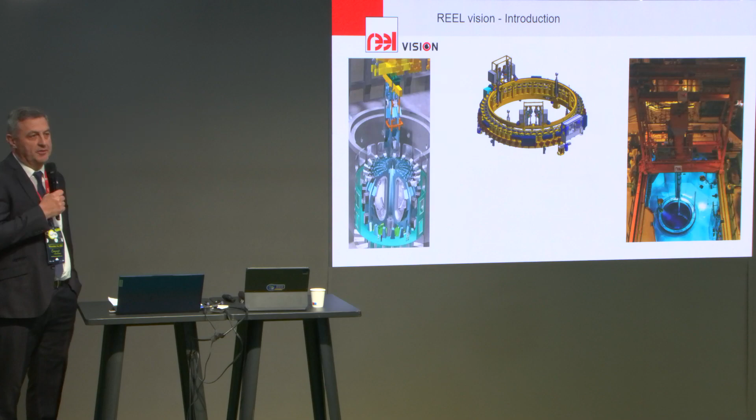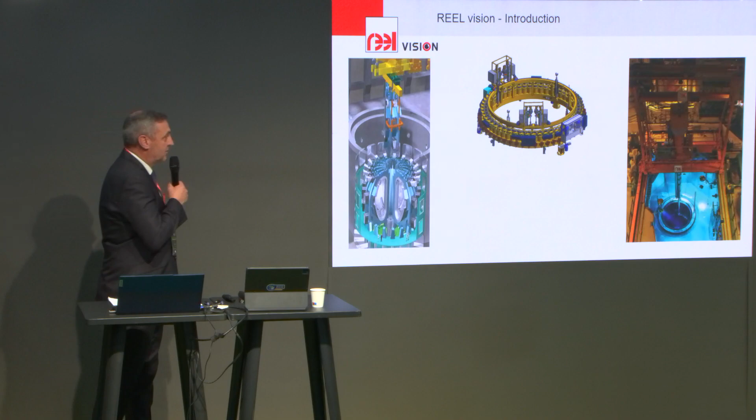REEL designs and manufactures several complex machines involved in a sensitive process, where a machine failure could affect directly the safety and performance of the process. It is the case in nuclear domain applications. You see on the right the refueling machine used to load and unload the core. In the middle, it is a multi-stud tensioning machine used to open and close the nuclear core cover. And on the left, the ITER crane.

The design of this machine must be safe and reliable, in order to limit as much as possible the process downtime and operating cost associated. That means we have to secure the maintenance of this machine to be able to say that they are secure and safe to achieve their roles and performance.

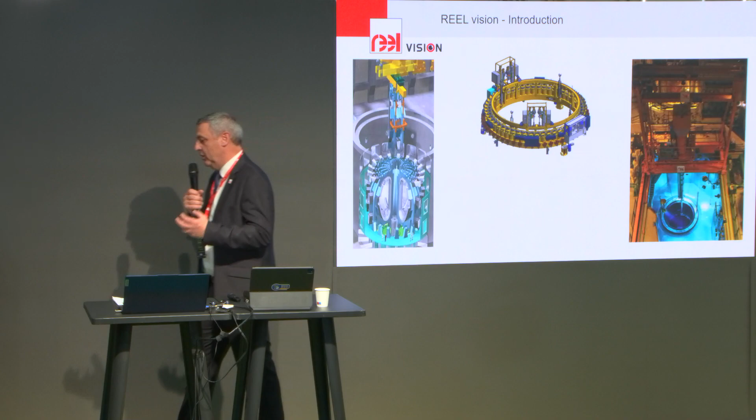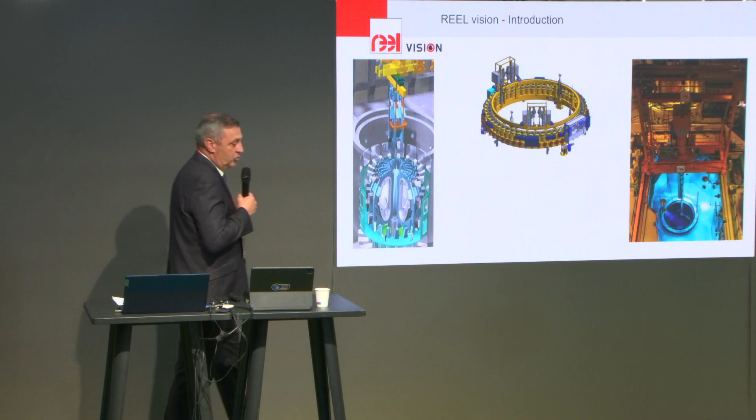We have also to anticipate the maintenance. To secure the maintenance, first we must be able to deliver a secure and reliable diagnostic. And to anticipate the maintenance, we need to be able to predict the failure before the event occurs. We can say that today the current conventional solutions, corrective and preventive maintenance, don't allow us to achieve these requirements.

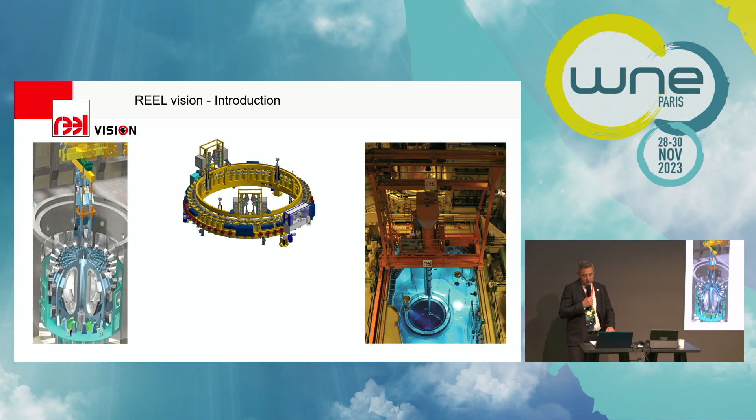So in this context, REEL has been engaged for several years in an R&D topic to develop its own online service platform dedicated to its customers, to provide them factual and reliable data regarding their machine condition in order to anticipate the maintenance. That means to be able to deliver data to the people to make a quick maintenance and to have a good troubleshooting.

To optimize the production, this data will allow us to generate performance KPIs, which is the key input for the global continuous improvement process. To improve the quality, this data is able to generate some KPIs that allow us to detect any deviation of the machine compared to a nominal reference, and like this improve the safety and quality level of the machine.

And then to develop skills, that means this data allows us to have feedback on how the operator drives the machine, in order to give opportunity to REEL to improve the design, in particular regarding HMI, maintenance tools, etc. So this is the main purpose of the REEL Vision IoT platform.

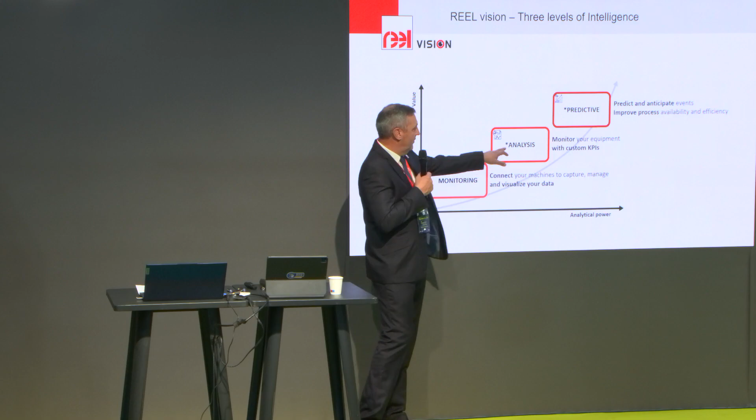Then you have the analysis level. We analyze the data we collect from the machine in order to define some specific KPIs to monitor the machine behavior.

And the last level, called predictive, the idea is to give some KPIs we consider to predict even before the failure occurs, in order to be able to repair it and not impact the process downtime and operating cost associated, while improving the safety and quality level of the machine.

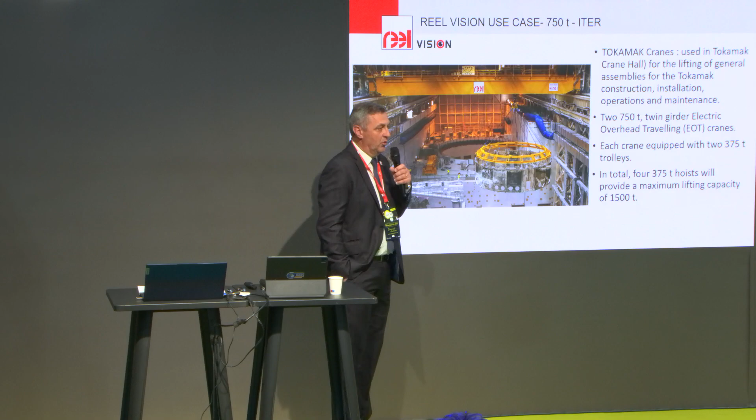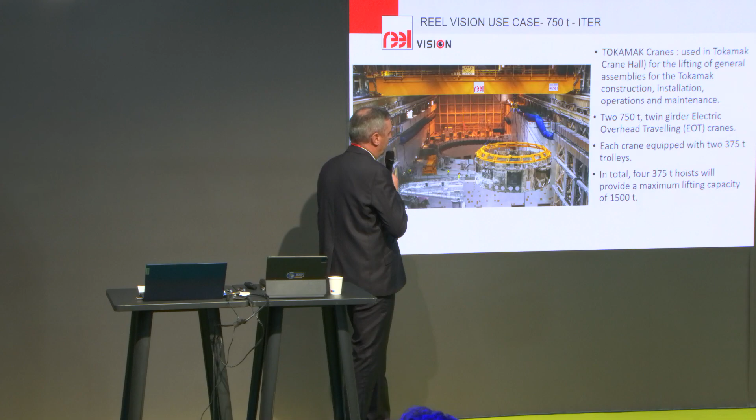The ITER crane is a very huge crane, 750 tons. We have 2 cranes with a maximum lifting capacity of 1,500 tons. They are installed in a tokamak hall and used for lifting of general assembly for tokamak construction, installation, operation, and maintenance. And you see on this picture the handling of the cryostat thermal shield before putting it in the core.

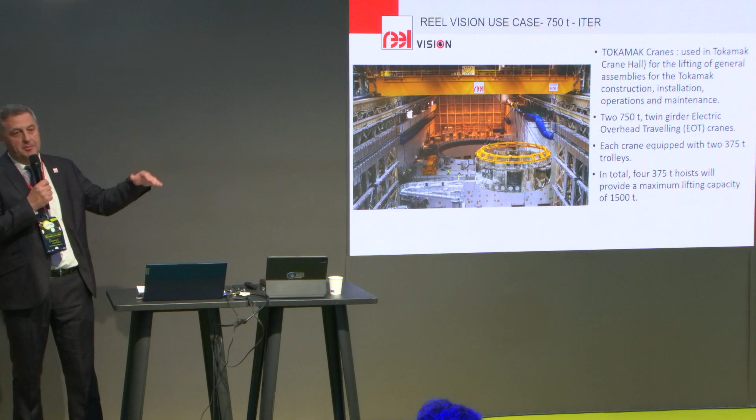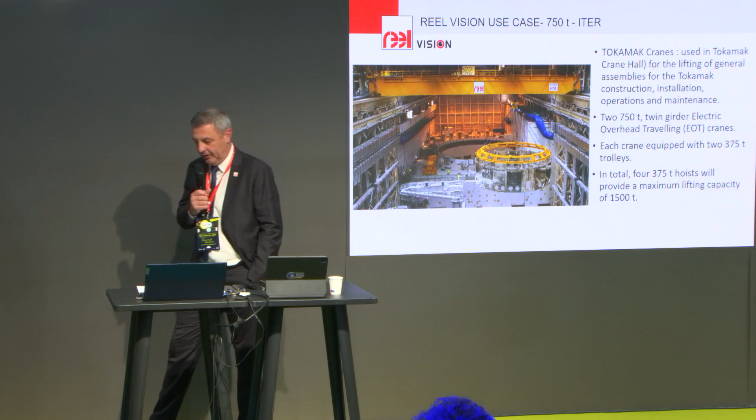So you can imagine that this type of handling operation is very sensitive and requires for the crane in charge of this operation a high level of safety, availability, and reliability. It is why we proposed to our client to connect both cranes to our IoT platform, the Reel Vision IoT platform, in order to be able to secure the maintenance activity before the operation, to secure information about reliability.

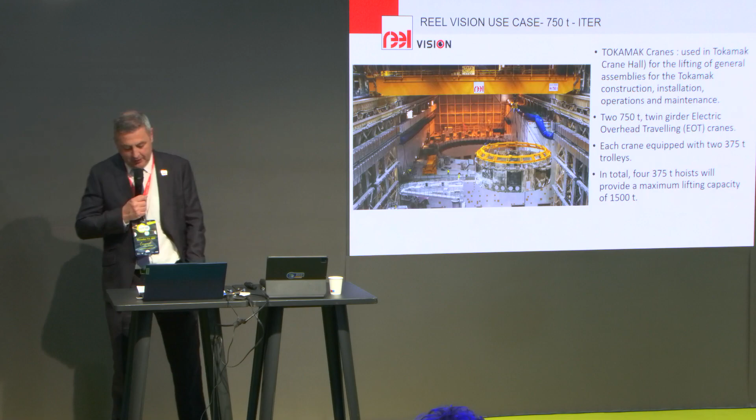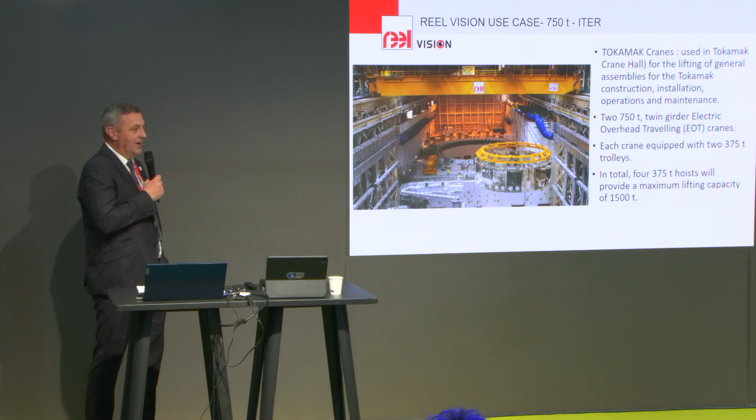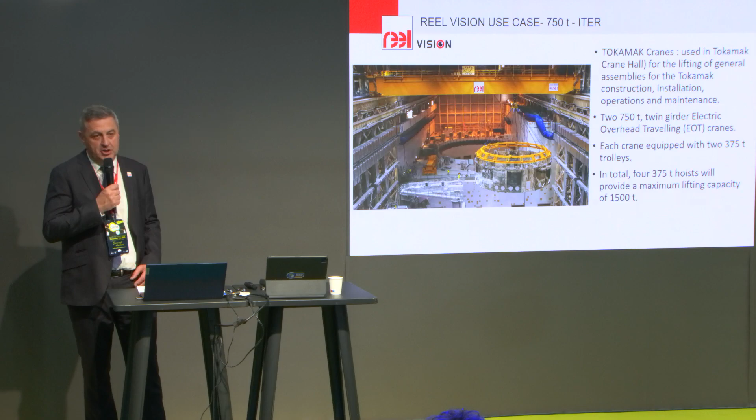Currently, the data coming from the maintenance teams are not reliable and comprehensive enough. The platform will help to prevent any abnormal event before the operation, and will help us to deliver the best Reel expertise in case of failure during the operation. So this is the main objective of this connection. In summary, it is to secure the operation done by the client, ITER.

Two important points to highlight here. First, the main data we want to display on the screen are available in the source code of the PLC. So we didn't perform any modification inside the code. We just make them available in a specific exchange table inside the software. And the coupler's role is just to collect the data from the exchange table and to send it to the IoT platform. That means it has only read access to the PLC.

So these two points are very important to justify to our client that, first, we didn't need any modification inside the PLC, so we didn't degrade the level of safety of the crane. And second, we address cybersecurity correctly because we have only read access from here, so we justify clearly that we cannot modify the software from the coupler.

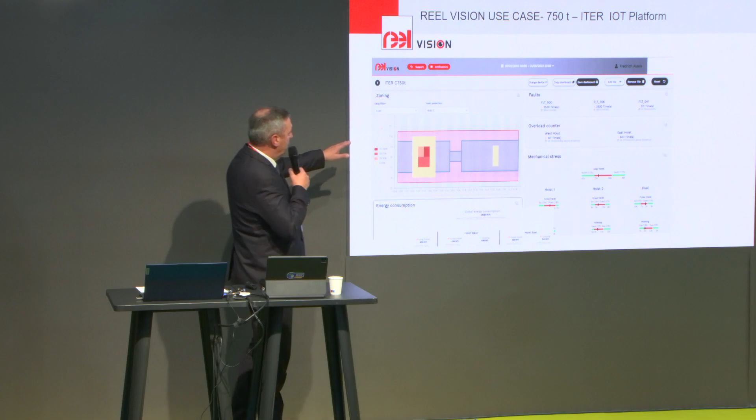We are also able to implement some specific dashboards following specific client requirements. So for example, the zoning: we are able to show where the machine is often used, maybe to identify or to require a specific maintenance of a part of the building, the runway, etc.

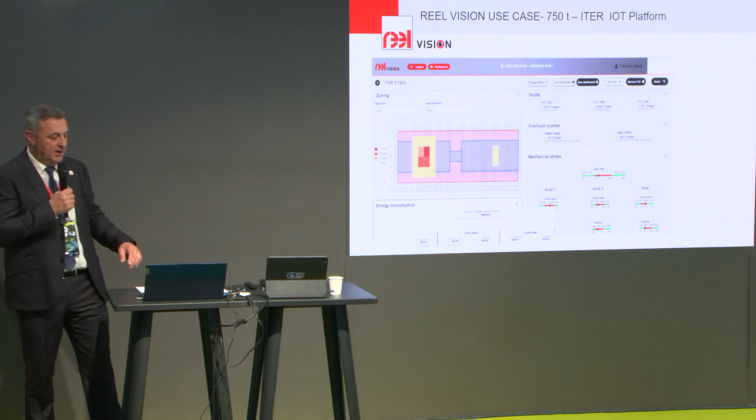This is also another dashboard to show the different types of alarms and faults detected, and you can see easily that this fault occurs often. So we have to do something. So this display can introduce a decision to do something, to do a specific maintenance, to change a component very quickly. So this is a specific dashboard we are able to design according to specific requirements of our client.

So as a conclusion from this use case, what are the next steps for the next IoT project on a Reel machine, also on others, because we are able to implement this IoT platform on machines which are not designed by Reel. The first step is specification. So it's very important with the client to define clearly what IoT challenges he wants to address.

Of course, we can help the client to write this specification to be sure that at the end he will take advantage of the Reel IoT platform by exploiting the full potential of the machine data, depending on the level of intelligence he chooses.